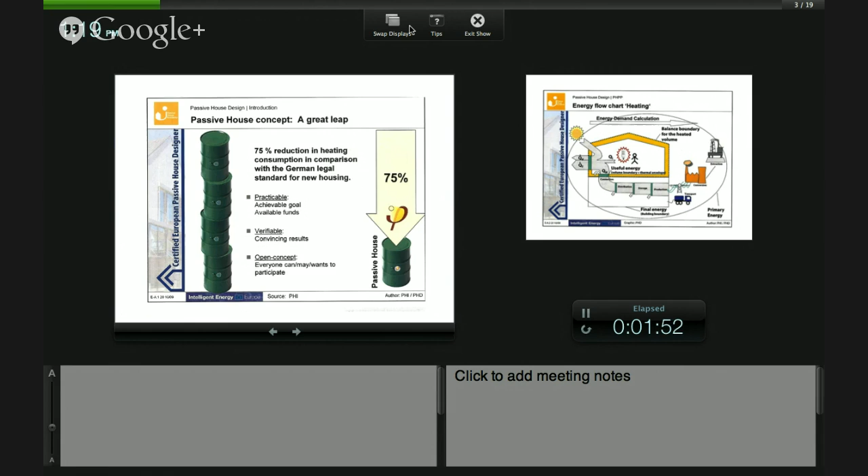One of the things that Ken and I are going to be talking about is the opportunity to save at least 75% on the heating consumption as compared to standard housing. And I'll show a little bit of the reason behind the energy savings, which is primarily in the insulative values of the envelope and the air tightness of the building.

So this is an important slide in terms of understanding what is involved in getting a certified passive house. We're not taking into account the losses from the extraction, conversion, transport. That's just to illustrate where the energy is coming from. But the primary energy coming into the building boundary is the electricity, might be the natural gas and the fuel oil, whatever you have.

But you have certain gains, and this is one of the issues behind the passive house concept, for northern climates. Maybe I should clarify right at the start that the passive house standard originated in Europe, in Germany and those countries where you have cold winters, and that's why a lot of the factors involved in the passive house system involved capturing solar, so that solar gain.

There should have been QS coming in if you're going to identify all the various Q factors on here. This is the heat that's coming in that's not lost, transmission losses, ventilation losses, and also an important factor is the internal gains. Just the fact that you have a light bulb on, a refrigerator, stereo, hair dryer, people are all factors of energy that you can capture within here so that you don't need, say, a large furnace for your energy gain.

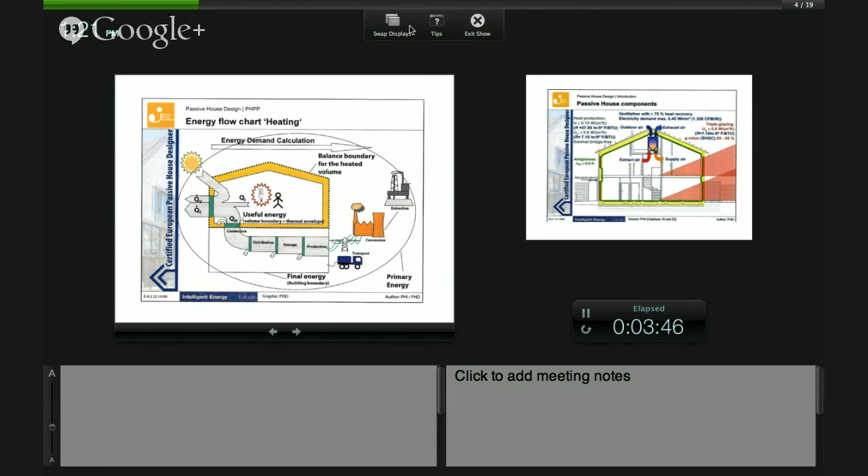One of the ways that passive houses, well, actually, the way of achieving the 75% saving is to have this heat exchanger, energy recovery ventilation, where the air coming in is conditioned by the air going out so that you achieve 75% heat recovery. You can see this is a winter scenario where you have the low angle of the sun coming in and heating up the interior.

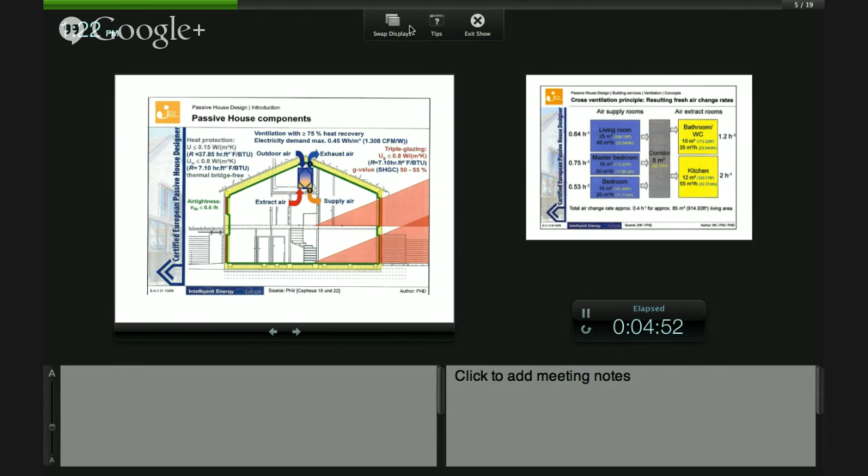But one of the things to look on here is the connectivity or the connectedness of this insulating envelope in yellow here, and the green here is the airtightness barrier. And a lot of the busy work, I'm going to get into what those numbers mean, but one of the ideas behind the principle of cross ventilation, for example, would be bringing in the outdoor air that's been conditioned to the living spaces.

You might go into a corridor. Then you extract the air to the outside where you have things that you would expect, perhaps odors or other kind of bathrooms, kitchen, maybe utility room, places where you drop off your smelly shoes, laundry, that kind of thing.

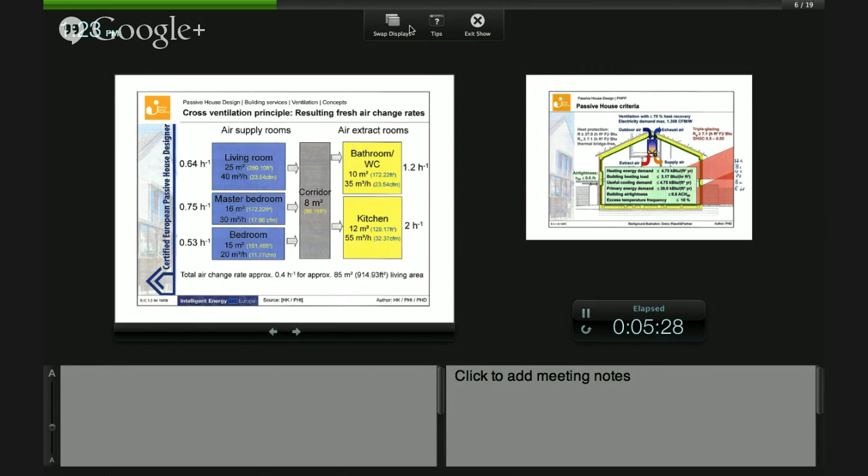And this is the 6 factors for getting a passive house certified. You'll see this number when Ken talks with the 4.75 kilo BTUs per square foot year for the energy heating demand and the cooling demand. You'll see this number in a few slides here.

This is the heating load, and I'll explain a little bit the difference between the demand and load in a second. But 3.17 BTU per hour square foot. This is sizing the heating system, whether it's a heat pump or other device for bringing in the energy. And this is typically about 10% of what a normal building would have.

So you can see right off the bat that there's a lot of expected energy loss in a standard built house. And then this primary energy demand, 38 kilo BTUs per square foot year. This is the energy coming in. So if you've got electricity coming in, fuel oil, natural gas, all these things, you look at what the demand is here and what you're using for heating and cooling, and the heating and cooling is like 12.5% of this total.

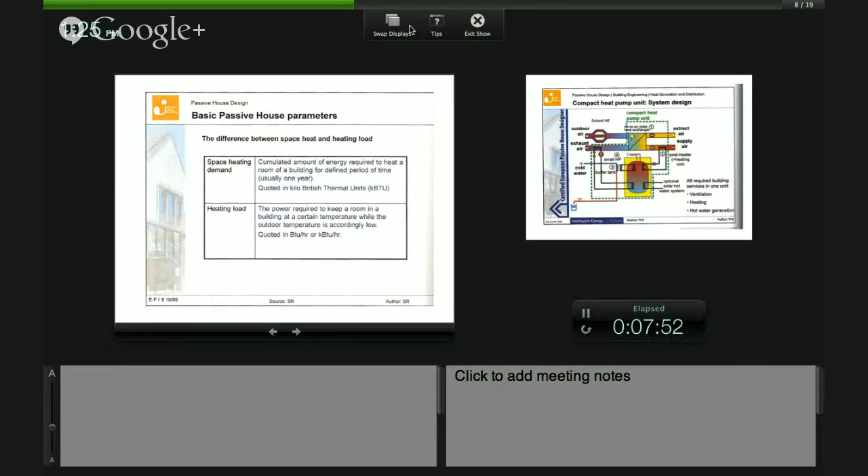One thing I didn't mention in this certification criteria is the building airtightness, and this is the level that you have to achieve, air changes per hour at 50 pascals. You put a blower, a fan making a negative pressure, and if you can achieve that air changes, then you achieve the standard.

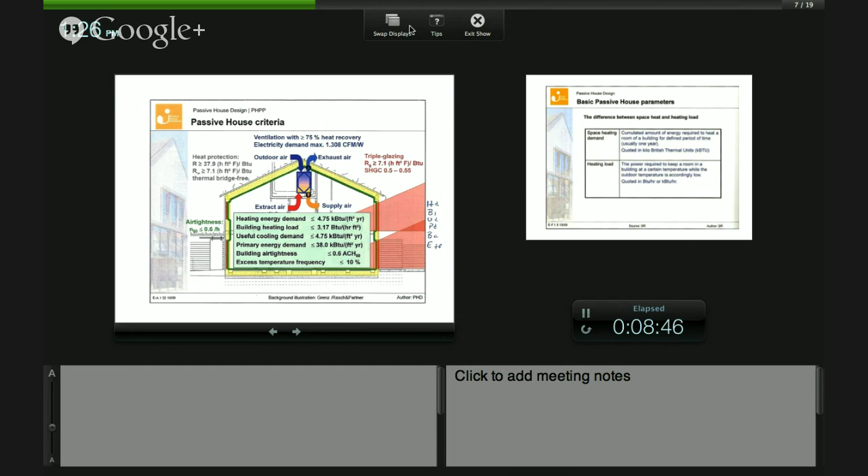And there's also some accommodation for excess temperature, but the ideal is 68 degrees Fahrenheit. There's a little accommodation in the summer where you can have some excessive temperatures because of the heat being involved.

This is the design for a compact heat pump, and you can see a lot of different factors. There's things going on all over here where you have a subsoil heat exchanger where air is going through a system that's below ground, where like in the New York area, the temperature 3 to 6 feet below ground is at a constant 52 degrees Fahrenheit. You can condition outdoor air coming in.

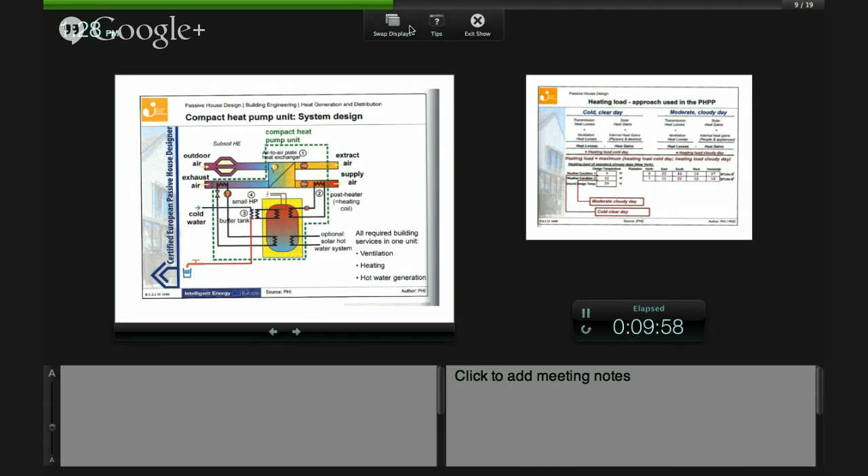You got a heat exchanger. You could have a solar water heater. Could be a way of heating up your water here, but because of the low heat demand, or because of the low heating load, you can often do everything that you need done with a heat pump as opposed to a furnace or air conditioning.

One of the ways that you size the heat pump, for example, or whatever system you have for the heating load, is to pick the extreme conditions. Typically with a passive house, you look at the moderate cloudy day as what you model it to be most conservative. And so you don't want to size something that's not the most extreme.

And the idea behind this is even though it's cold and clear, you're getting the radiant energy, but because the envelope is so well insulated, it's this condition that you might have to use more heat because you're not getting the solar energy.

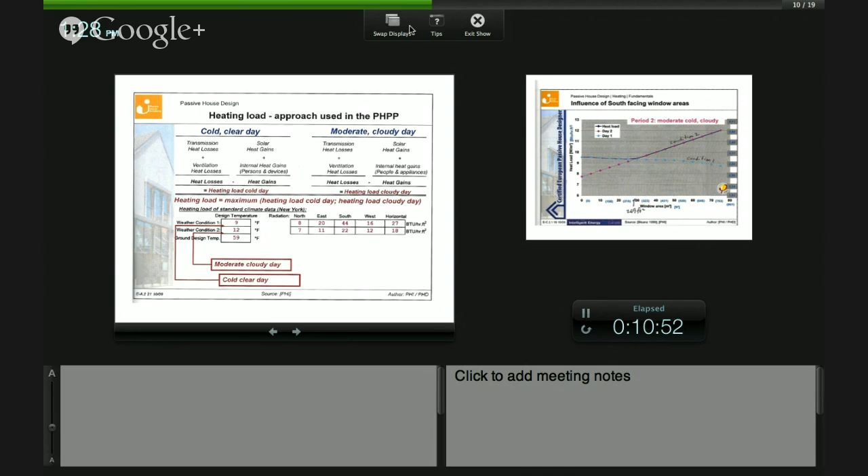And that's why that works out that way. There was an example in the training manual I borrowed here that shows the influence of the south-facing windows and what square footage was necessary, not too much, not too little. I think it turned out to be 30% of the south-facing wall was this area here, and if you had one big window, it'd be 16 by 16, but the 269 square feet.

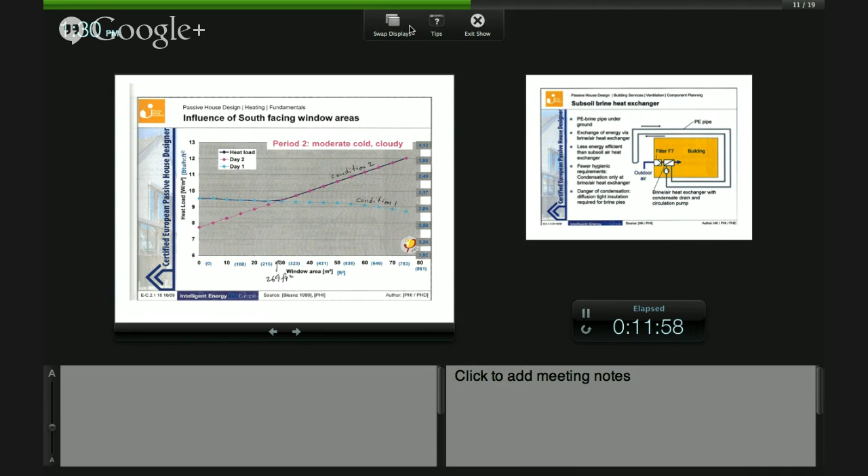You can see the 3.17 is the heating load that you can't exceed if you have a passive house. And it was right at this intersection of the second condition, which is the moderate cloudy day, and this is the cold and sunny, and the intersection right there. And that's how you come up with a design for how big the window should be and the percentage of the wall.

This is an interesting way of conditioning and capturing the heat from subsurface, having a system that's filled with brine that's capturing that constant 52 degree Fahrenheit temperature that you can condition to indoor air. So there's a lot of different ways of reducing the energy that you need to create. Various parameters. I wanted to just highlight the no thermal bridges factor in passive houses, because this is where you get the low energy usage. I've got an example that's right after this.

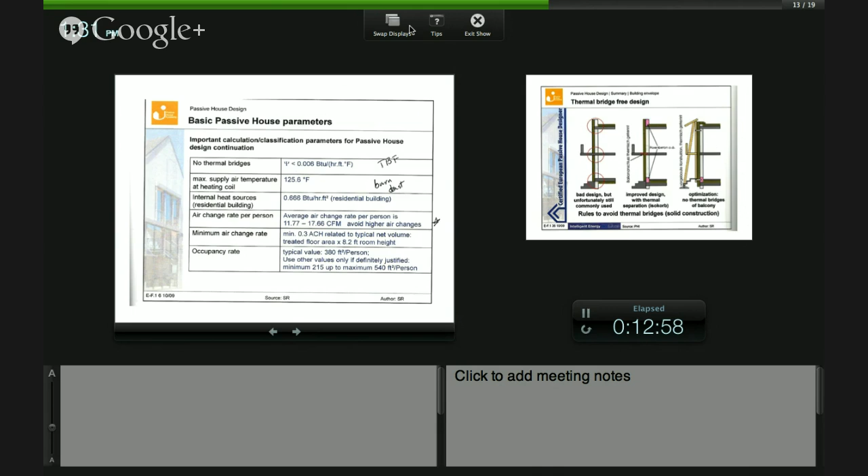Average air change rate per person, minimum air change rate, occupancy rate, a lot of these different things that you plan on. But this is a diagram showing the issue behind thermal bridge free design, where you might have some cantilever balconies where you got a lot of heat loss through here. And what you try to do is break up this insulated barrier and create a separation. So even though it's still there, you can, for example, have the structure on the outside of the wall. You have some shading going on there, and you have the balcony there, so that it's kind of like don't violate the envelope insulative layer, because that's what's getting you the features that you need.

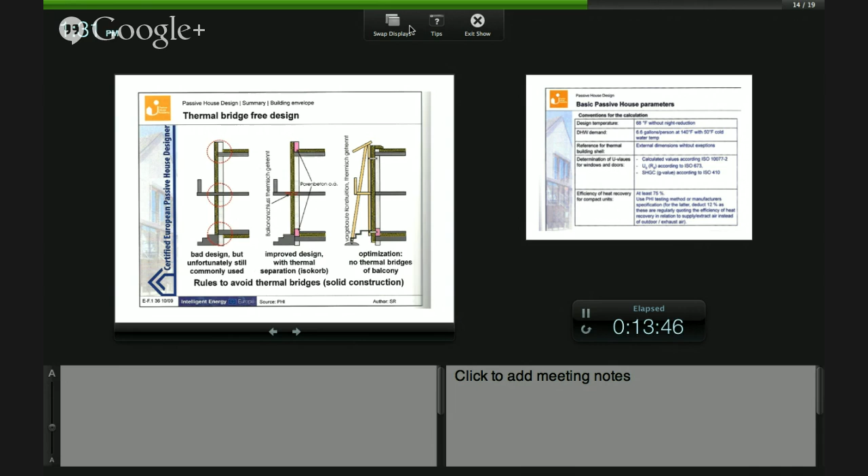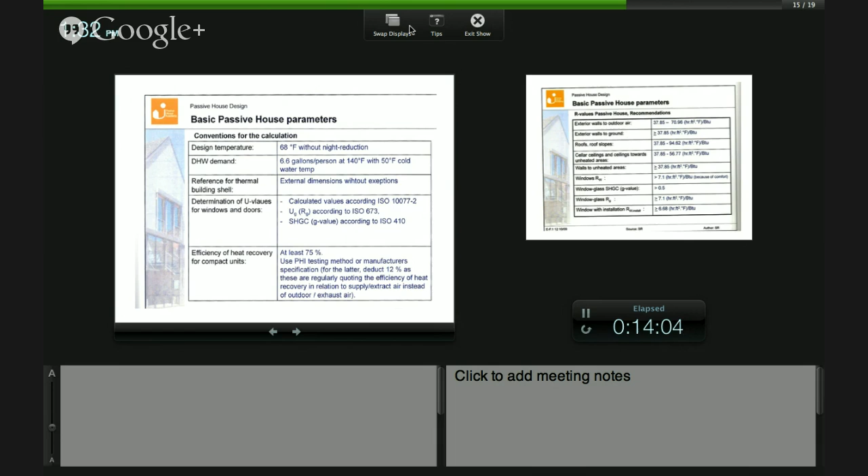Some more design features of the passive house, just for examples of hot water, domestic hot water design, 6.6 gallons per person. Some additional factors. Now this is getting to be pretty large. I guess in some very cold climates, having R value in excess of 70, if you had batting or wool of some sort, extruded polystyrene, with about 10 inches, you can achieve the 37. But you can see an example of the R value.

And one of the things interesting is the windows. Even though the windows are giving you this much lower than the 37, which is the standard, you're getting the solar gain, but it's not so much that you're losing it once it's gained. So this is the triple pane window, which is standard for passive houses.

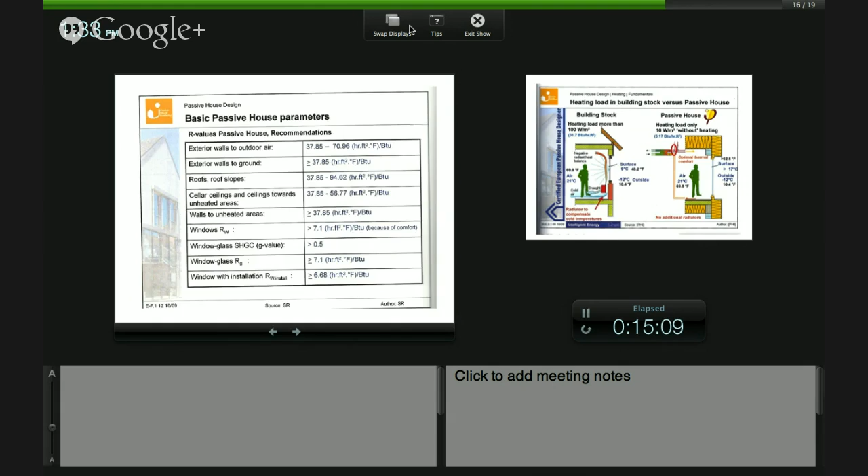And this gives you an example comparing the standard building stock and passive houses. You can see where the triple pane glass is allowing you to maintain the comfort level at average around 69, 70 degrees. Here's the heat pump, heat exchanging. As opposed to the standard house where you have a radiator near the window, and the reason the radiator is near the window is that that's where you're getting a lot of the losses. So there's a lot of variation in the interior temperatures.

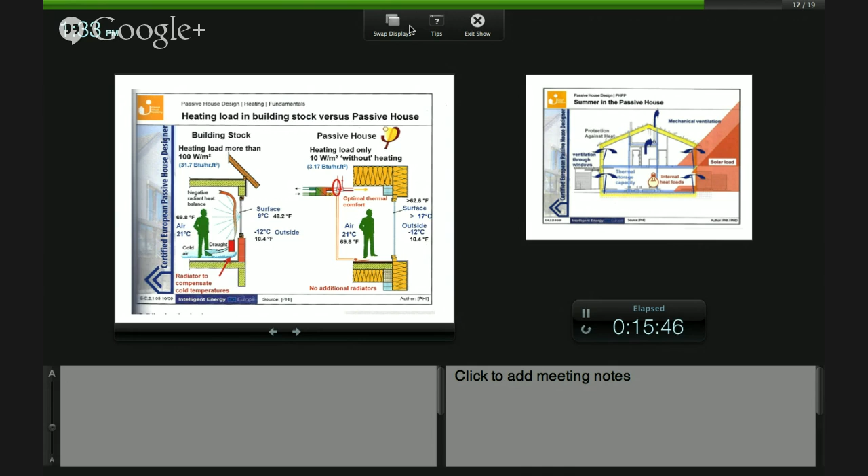This is a diagram showing in summer you might want to open some windows. You got the solar coming at a higher angle. And it's an alternative way of running your passive house.

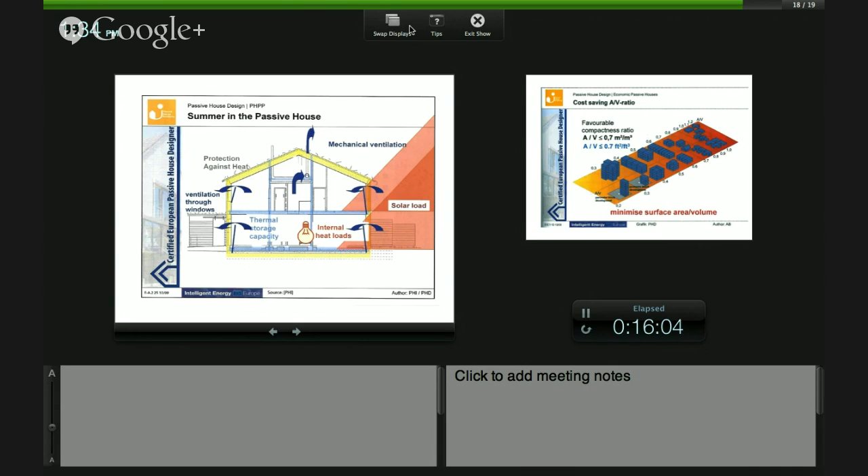And my last slide before I tell a little story, this is an example of what is the configuration that's optimal for a passive house. Looks like anything greater than 2 stories is the ideal. Once you get down to single story, it's kind of hard to have an optimum area volume ratio. So as you go from 0.7 on this way, it's a lot easier to attain the optimum ratio.

I wanted to leave with a fable that I wrote to illustrate the point about passive houses. And the point, I think, is there's political and economic issues involved in why isn't passive house the standard? Why is it the exception? And if you just think about the natural gas industry, for example, where we've got houses that leak energy, and because natural gas has been cheap, we just burn it and waste it.

So I wrote this fable just to illustrate what I think is maybe some of the problems and provide some opportunity for people to reflect when we get into question and answers. Let me see where I'm at on the time here. Okay.

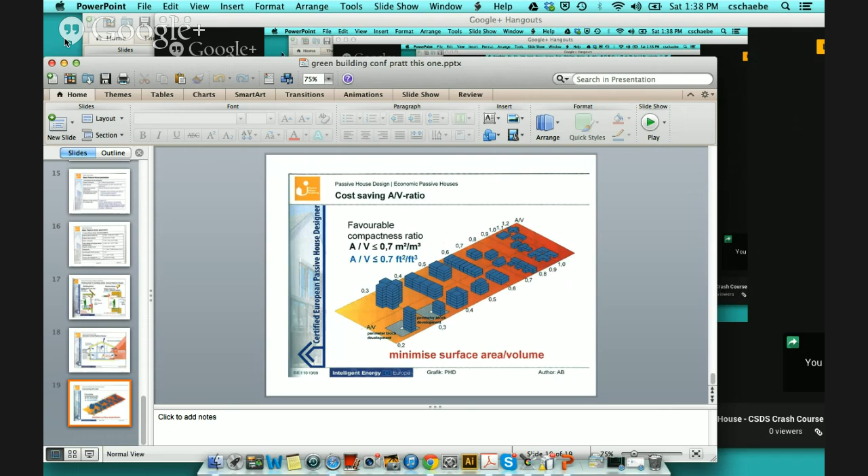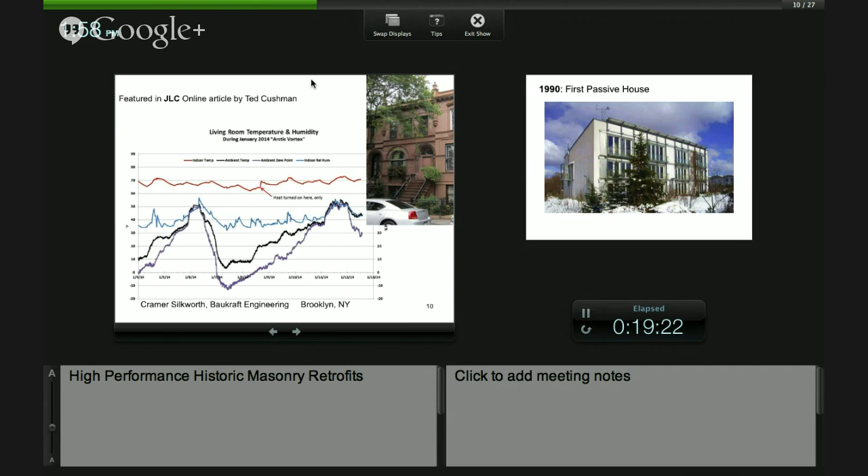So again, it's all pretty new in a way. 1990 is the first passive house. It's 4 flats in Darmstadt, Germany. But in another way, it's all old. The neat thing about passive house is it's not reinventing the wheel. It's not really new technology. It's been there. What they did was they just much more rigorously integrated it.

Insulation, yeah, there's an evolution in components, in the windows, in the insulation and air sealing products, but it's not a revolution. It's not really a new way of thinking about things. It's just thinking it through really thoroughly and thinking it through on day one and really incorporating it.

A lot of folks have problems, and it's one of the main cost drivers that we see in first projects, is that people find passive house and get really excited about it. They have a project on the boards which is already basically designed, and they say, oh, this has got to be passive house. We can't build this not passive house anymore. But at that point, the building wasn't designed to be a passive house.

And while a passive house can be any type of building, it's really shoehorning the methodology in if you've already got a building and you're trying to make it work. It's theoretically possible and easy in some cases, but a lot of times you end up seeing ridiculous sort of things that need to be done to be certified.

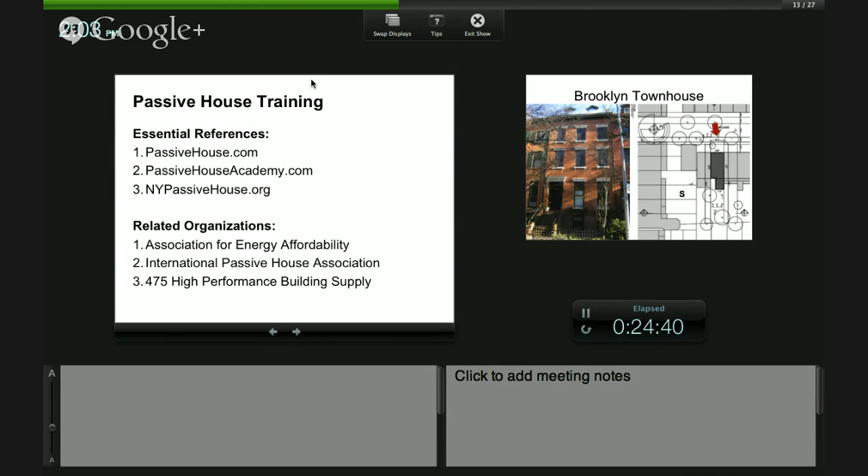The International Passive House Association is part of the Passive House Institute. And then I'll put our own company in there, just as a pivot point. We're really having a lot of fun talking with people from all across the country, getting people together and planning this conference in New York. We're planning one in Portland, Maine for September, a continental-wide conference. So a lot of exciting things. And we do a lot of building science related stuff on our 475 website around the Passive House concept.

So the first project that we were fortunate enough to do to the Passive House standard was a retrofit of an 1847 townhouse in Brooklyn Heights. One thing about retrofits: you use the Passive House methodology for any construction, which we'll talk about more in a second. But to the extent of actually hitting the certification metrics, it can be quite difficult and onerous.

And unless you're doing a renovation where you're gutting the building, it's going to be nearly impossible to hit that kind of energy savings. So for retrofits and renovations, we're talking about essentially gut renovations. You may be able to salvage parts of the inside, but the shell, you need to get to every part of the shell of the building all the way around.

But it's doable, and you can have, you know, this is sort of, we put back some of the historic detail, and there's a bit of modern eclectic depending on where you are in the house. But passive house doesn't have to look modern, doesn't have to look historical. It can look however you want the designs to look. It's not mandating any particular approach to the work.

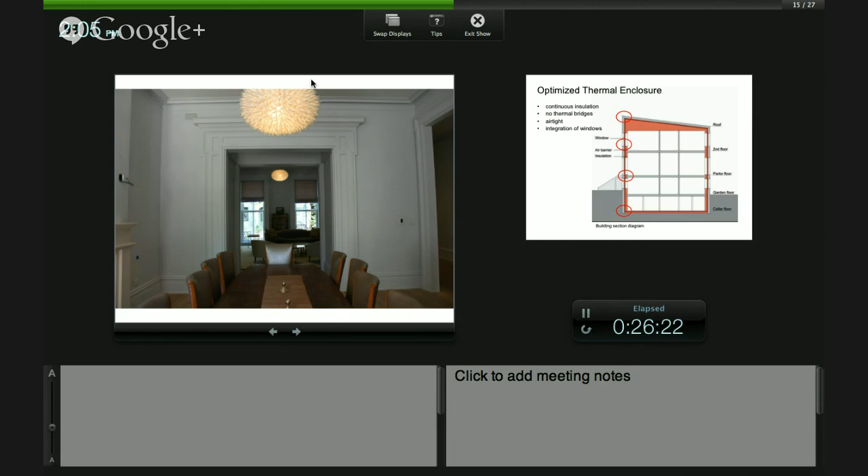But it is regarding the guts of the building. So first and foremost, as Maury was talking about before, is really optimizing the thermal enclosure. And this is sort of the main hurdle, not the only, but the big one. Because to think about passive house conceptually, and where the name comes from, is you're really trying to optimize those things that you have to do anyway, the parts of the building that need to exist essentially even when the lights aren't on.

So you have to have insulation in the building. You're going to do it. You're going to have windows. You need to have airtightness. Now, some people would argue you don't need airtightness or you don't want it, but as we go into building science fundamentals, airtightness is really second to keeping the rain out. We all agree you need to keep the rain out of the building. Airtightness is the second most important aspect of a well-performed building. It's even more important than insulation.

If you had money to spend on upgrading a building and the choice was between installing insulation or airtightness, spend the money on airtightness. It's a huge impact in terms of the efficiency and the comfort and the indoor air quality, and the longevity of the construction, the quality of the construction.

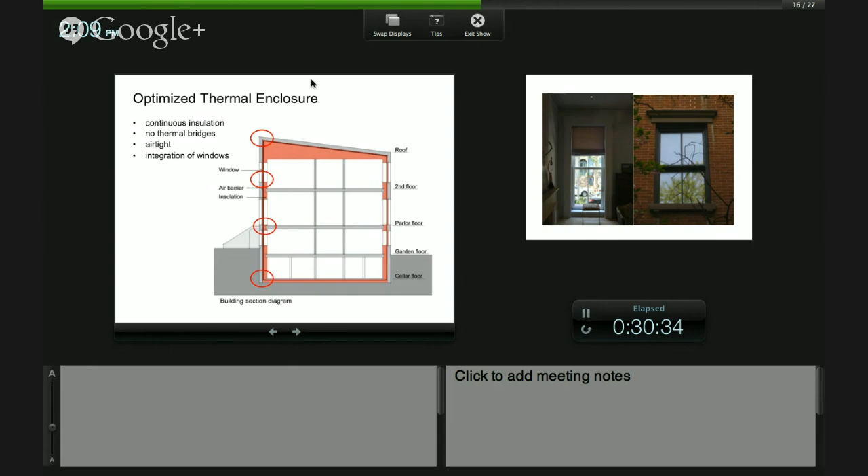And the windows, you can't have double hung windows in a passive house. That's the bottom line. Tilt and turn, fixed, casement, things like that, but double hung windows essentially leak too much. Even the good ones, they'll leak. You basically have to nail them shut, tape them shut, and walk away from them.

So over a series of projects, we were actually able, with some other architects, working with the Landmarks Preservation Commission, to develop some early simulated double hung windows. Thank you. So what you have is a fixed window. This pane doesn't move at all, and the bottom is a tilt-turn window.

So it opens like this. One way, this is the tilt, the hopper, and then like the casement and swinging. Now, I would say if you're working in historic districts and you need to deal with the Landmarks Commission and the preservation community, and you may be a preservationist yourself, the two things aren't exclusive, although sometimes it can seem or feel that way when you're trying to innovate and do something new, particularly around insulation, and there are a lot of red flags thrown up.

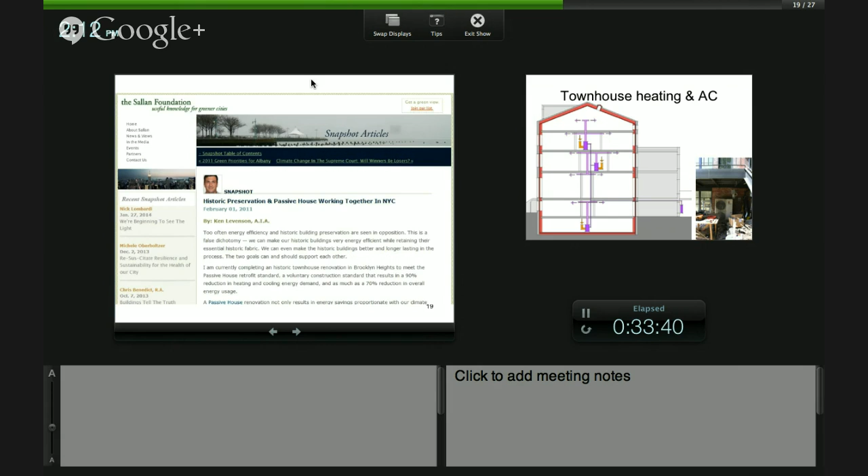So the heating and AC. I should note, no matter how much outreach we did, the windows were so problematic, we had like 4 different preservation groups testifying against us at the public hearing, screaming that the tilt turn, simulated double hung windows were the end of civilization as we knew it. And they weren't kidding. It was really quite an experience. But funnily enough, once the windows were installed, the head of the Brooklyn Heights Association, who lives like 2 blocks away, walked by and was like, oh, well, maybe they won't be so bad after all.

And the Landmarks Preservation Commission, I should say, has been incredibly supportive. It wasn't a unanimous approval, but we did get approval, and the designs are changing over time and getting better. The thing that's really neat to pitch to the historic districts is that we're reducing the mechanical systems by 75%. All the neighbors to this house had 12, 15 tons of air conditioning on the roof, and you get an exemption for mechanical systems in the historic district. They can't do anything about it.

We calculated for the house where the neighbors had 12 to 15 tons that we needed 1.5 tons of air conditioning, which is 18,000 BTUs, a window unit. That could be 18,000 BTUs right there, which scared the heck out of us. Because if you're spending $1.5 million on your home renovation, you'd like to put in a little bit more than that window unit.

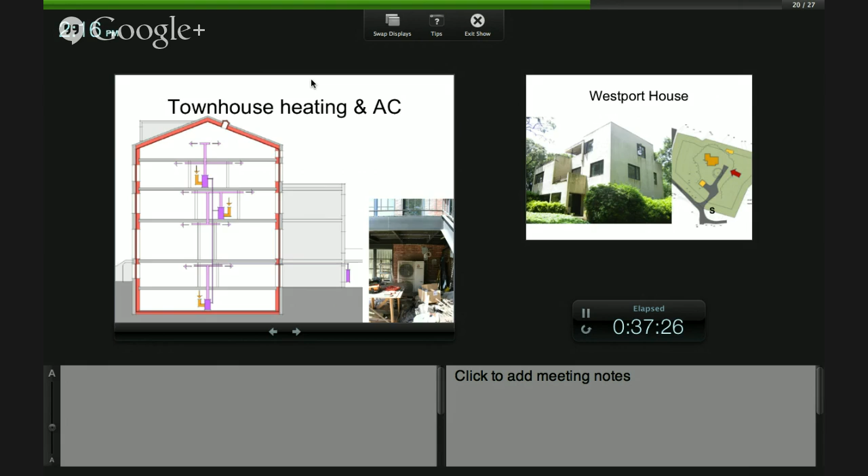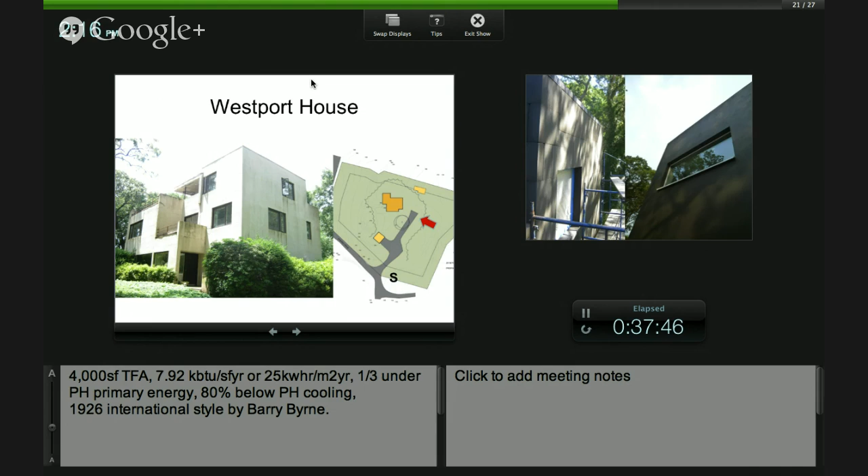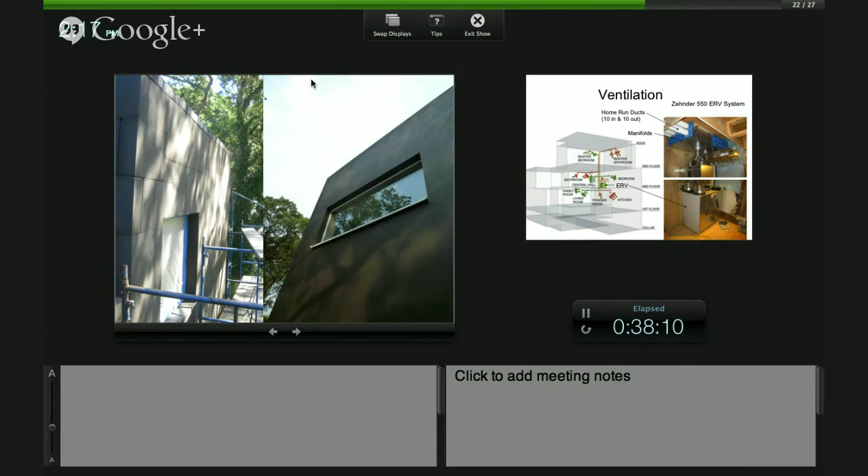house renovation in Westport, and it was actually true Bauhaus construction, a concrete building from the 1920s, and we essentially wrapped it in this foam glass insulation and stuccoed it, and architecturally did some simplification to the building. So where in the historic townhouse everything was interior, this was almost everything exterior to the building, just really wrapping it. And here, literally, you can see it wrapped in a parka completely. And you see the windows integrated.

So the ventilation: basically what you have is an ERV or HRV, which is doing the high efficiency heat recovery. So you have supply and exhaust ducts going through the exterior wall here. Well, they haven't been hooked up yet, they're coming out of the top. And then return and supply distribution ducts going out through a manifold through the building.

The ventilation air is running continuously, 24/7. It's never shut off. It's not like a bath exhaust where you run it for 10 minutes and you kill it. It's running 24/7, but at a very low volume. One of the things with passive house is you're trying to maintain very good air quality, but you're trying not to waste energy. So like Marty mentioned, the minimum requirement for heat recovery is 75%. So as you're continually exhausting air from the house, you're retaining at a minimum 75% of the heat.

So you're keeping the warm in, the cold out, or vice versa in the summer, keeping the cold in and the warm air outside. The units, like the Zehnder unit and others, have heat recovery efficiency now of well above 90%, which is pretty amazing. And you can recover some moisture with the ERVs to help with humidity issues, but it may not be necessary. It gets all very complicated very fast, and there's not really a consensus.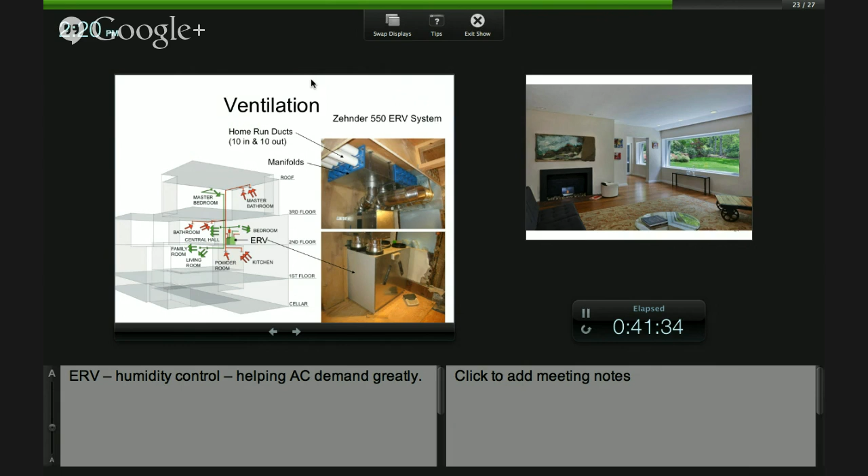But in terms of balancing needing to conserve energy and having fresh air, what they really try to do is supply just enough air to ensure really good air quality, but not more. So once you've supplied enough fresh air, which is roughly 0.3 air changes an hour, you don't need to supply more, and so you really try not to. And in the PHPP, when you're calculating a passive house, if you're supplying too much air and getting those additional heat losses, even though you're recovering a lot of heat, it's a real penalty, and it encourages you not to do that.

So this is just an interior shot, nice. And so these triple pane windows, like you saw in the earlier slide of the girls sitting in front of the window, big pieces of glass. You have floor to ceiling glass. You don't need heating under it. You can stand in front of it in the middle of the winter and be comfortable. I mean, it's really amazing.

That's a significant investment for a large window like that, right? Sure, but fixed windows are a lot cheaper than operable windows. And those big ones aren't going to be operable. I mean, that window weighs literally a ton. You need to have a forklift or something to move it around, or a good team of people to lift it up. So this was sort of the reinterpretation then, which the preservationists in Westport tried to stop as well.

And they were actually also pleasantly surprised, I think, at the end of the day, that it actually ended up getting a preservation award, because while we changed it really significantly, it was felt that we really maybe carried the spirit of the old house forward and rejuvenated it going forward. So that was really exciting.